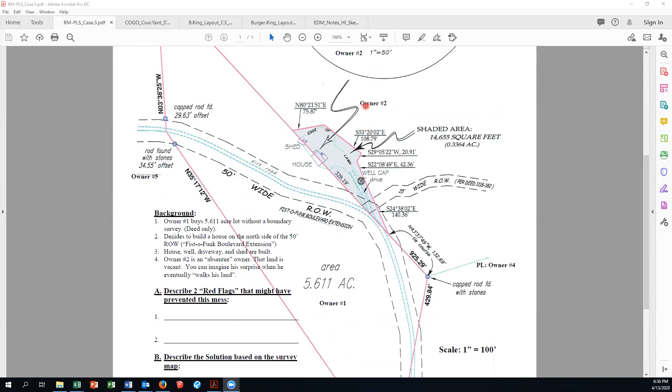So that was the first homework that was due. The second homework we'll talk a little bit about tonight, and we'll go back to it in a couple of weeks because we're not going to do any COGO tonight with new stuff. We're going to talk about doing a topographic survey and field notes for that.

But here's my calculations. If you went out to thousandths, I think it was 338.00. So the distance from WP1, which is the instrument setup point, it's N1E1. And then the first point that we wanted was WP3. Because it's a southerly dimension, this point is south, only about 10 feet of the north 0 line.

That would be a negative when you put it into the equations. So it's negative 9.61 minus the 63.73. So it's N2 minus N1 squared, and so on. So these are the answers. Most of them got them right.

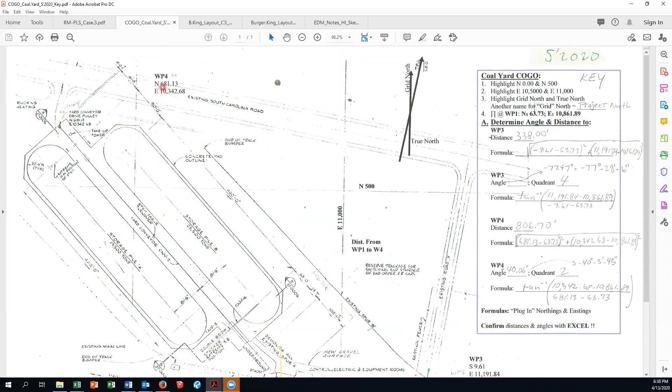And again, you're using these coordinate axes, which are running north-south and east-west. We're going to try to give you an exam in the next week or two. So with your calculations, or for the exam, go ahead and use the Excel. Learn how to use the Excel, and then also learn how to use your calculator. Okay, that's that. We'll come back to that at a later date.

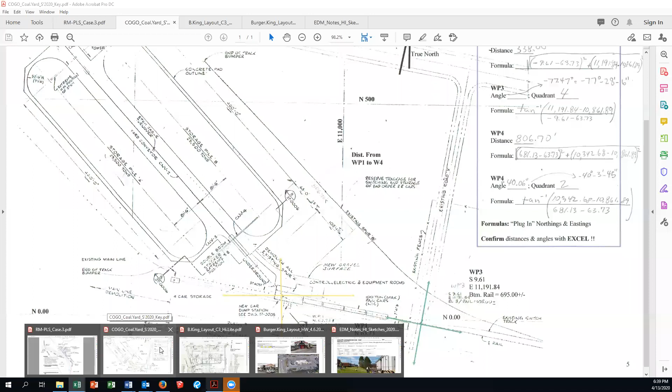Any questions on the COGO, coordinate geometry? Anybody? Bueller?

Okay, can you guys still hear me? Yep, yes we can. Okay. Burger King, not one of my favorites. Ooh, probably shouldn't have said that on a recording, but I like some of their food.

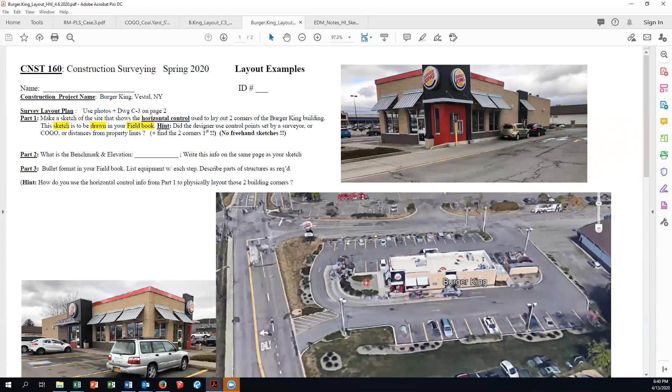Anyway, this one is a little bit trickier to do. Here's the aerial layout, the actual building itself. This is the drawing C3 that you were given. And the marked up C3 is right here. This one, not so good on the homework.

What you're looking for are tie-off points that go directly to a corner of the building. So the first thing you want to do is kind of zoom in on that corner.

You really don't see anything over to this corner or this corner, but you do see some arrows, not easy to find, on this corner and this corner. I kind of hatched it in blue - that's the actual Burger King itself.

If you follow this arrow, we'll pick this one in red and then this one in green. If you follow this arrow, you've got a dimension of 86.59 going back to what? What are they measuring to? Not a control point - they haven't given you any control points. So what are they measuring? The property line, okay?

Which eventually the property line is based on points that you can find in the field - 3 out of the 4. So you had to show me in your sketchbook, you had to show me the building, you had to show me this 86.59 up to this property line. I wanted to see that.

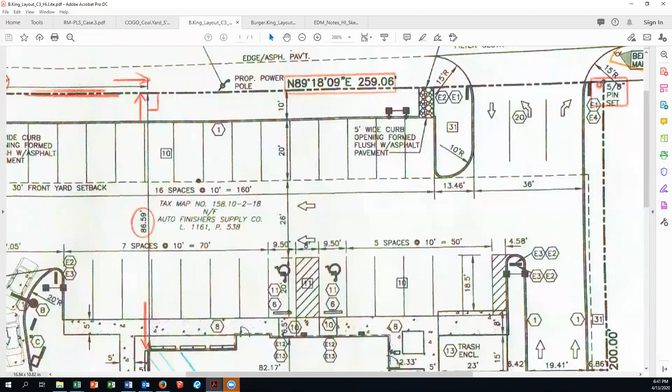This bearing and distance goes from this 5/8 inch pin that was set over to, whoops, nothing there - we'll talk about that in a minute. But you come up to this point, and then the distance I wanted to see was 103.87. Well, if that's 103.87 to there, you could have subtracted it from this distance, which gets you back to that pin that you actually can physically find in the field.

So that's about as much as I could find, these 2 points for horizontal control to lay this building out. Okay, any questions on that? We haven't talked about Part 3, which we will, because that'll be homework that's due - we'll discuss when that would work for you to be due.

Part 3, think about bullet format in your field book. List equipment with each step. So really all I'm going to be looking for is how do we locate these 2 points. Once we locate these 2 points, we can do offset points, and we can locate any one of these other points along the building, either using this civil drawing C3 or the structural drawings, which you do not have.

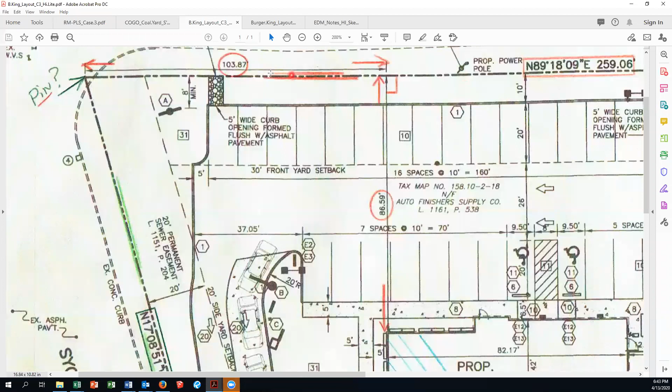Okay, this point over here has got another arrow - again, not easy to see - with a dimension 67.36 that goes from the building over to this property line. And this green line right here is the same as this, which shows they should have shown that as being 90 degrees. You'd have to assume that was 90 degrees to that property line here and then to this property line here.

So this is a 90 degree coming off of this property line. 67.36 gets you over to that corner. Where on that property line is this point? Well, it's not 44.20 - that goes back to the start of a curve for the entrance into the BK. It's actually the 69.9, which goes from this intersection at a right angle of that 67.36 foot dimension back to a capped pin found. So that's cap pin found.

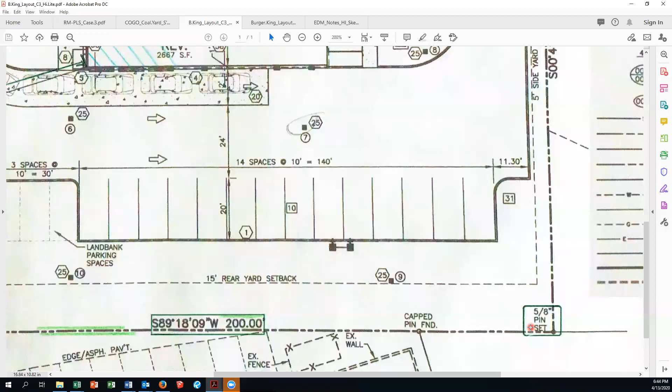Okay, you've got a bearing and distance here that you can use. You've got a bearing and distance here, which gets you over to a 5/8 inch pin set. So really, if you zoom out, of the 4 property corners you've got 3.

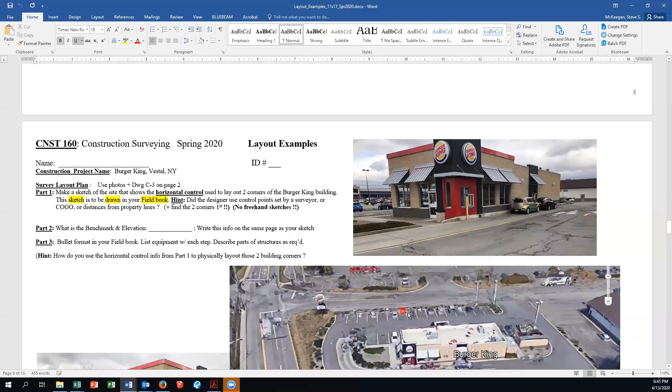Now, what office work - let me write myself some notes here. We're going to assume, you want to write this down somewhere, assume no obstructions. Because if you go back to the aerial, there might be a little obstruction right here, but there's really no obstructions, right? Now this is after the thing was built, so we're going to assume there were no obstructions. There might have been a couple of trees, okay?

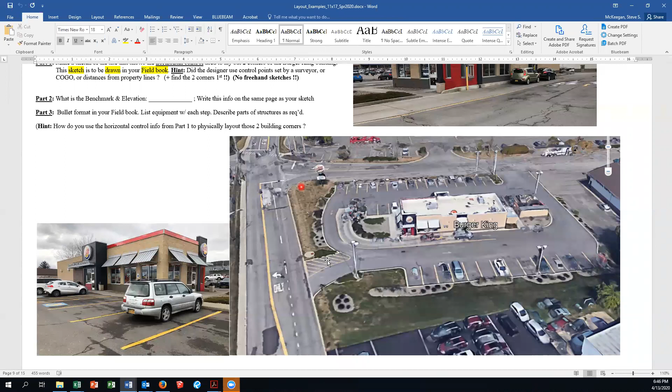So assuming no obstructions, what office work would you want to do before you go out to the site, walk the site, and then go back to the office? And using Civil 3D, what activities would you work on - what could you do in the office before you went back out to the site to lay out these 2 corners?

All you're given is this PDF. You're not given the CAD drawing. You're not given the original survey. But you have Civil 3D at your disposal. So what would you do?

Find your benchmark and set your pins. Now your benchmark has nothing to do with your pins - that was part of the assignment that was due last night. So the benchmark was there, and then there's its elevation. The benchmark has no coordinates, so there's really no tie-offs to that.

Hey, Mr. McKeegan, Bianca's in the waiting room. Who? Bianca. Oh, thank you. And also Mr. Hopkins. Great. Yeah, just chime right in if I don't pay attention to the waiting room.

Okay, so let's go back. What can you do in the office? You learned how to do this for Spec House 1. You were given the survey, not a CAD drawing, but the paper survey, the PDF if you will. What did we teach you to do with that survey?

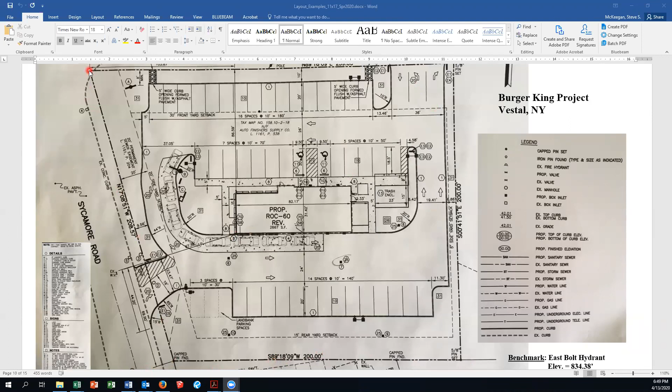And then from there, you draw this bearing and distance to this point. You now have this polygon, okay? And then from there, how do you locate this building corner? Now that you've located that property line using CAD, you now have these four corners.

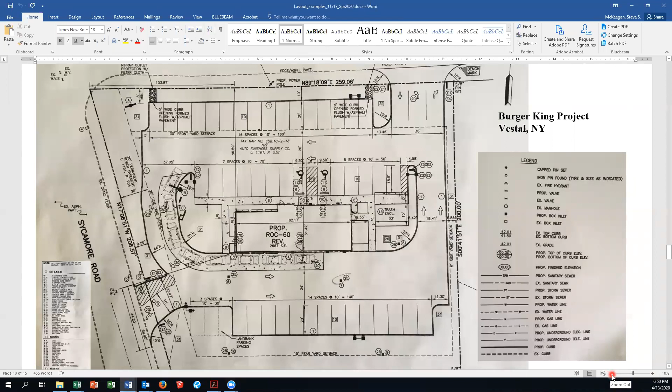Let me zoom out just a little bit. Right, you got these four property lines, all plotted. Now, how do you find this corner and this corner on CAD?

When in doubt, what? Offset. So if you offset this line 67.36 feet, it's going to be a line right there. And then you offset from here 69.9, that gives you that point. And then, 90 degrees will give you that point. So you now have that coordinate for that corner right there.

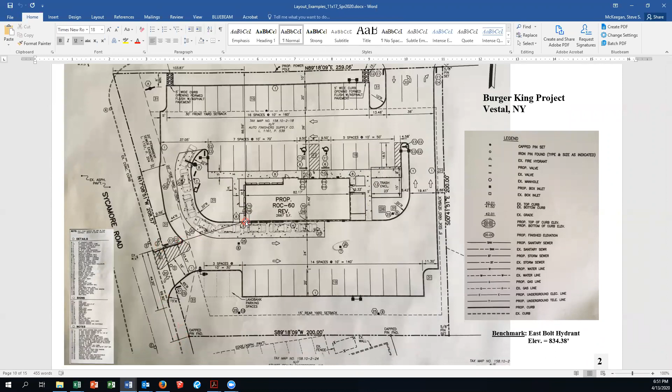How much do you offset this point? Or this line? I want these steps written in the homework. I want the homework for part 3 in bullet format.

How are you going to lay out this structure? I want you to describe exactly what we're talking about. You can actually, I'm not going to make you do it, but you can get on Civil 3D. That was part of the email that I sent you, that software is available through Horizon. So check that out. But you're going to take this line that you plotted in Civil 3D, and you're going to offset it

86.59 feet. Okay. You're then going to offset 103.87 from this point. That'll give you this point right here. Draw a perpendicular line from here to here. You now have the 2 points.

You actually now have their coordinates, the northing and easting for this, the northing and easting for this. I think next year, God willing, and the creek don't rise, we may just put this on Civil 3D while we're in the lab.

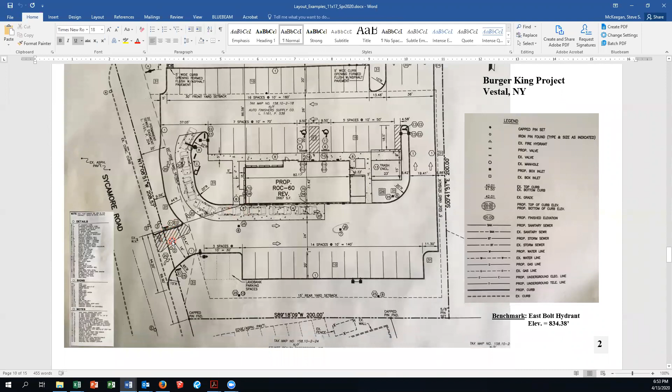So that's, and that was on the, oh, I thought it was. Oh, there it is. What the hell is this? Oh, this is just the, oh, there it is. Okay, sorry. So yeah, this is a right angle. It's got to be a right angle. There's no other way to do it.

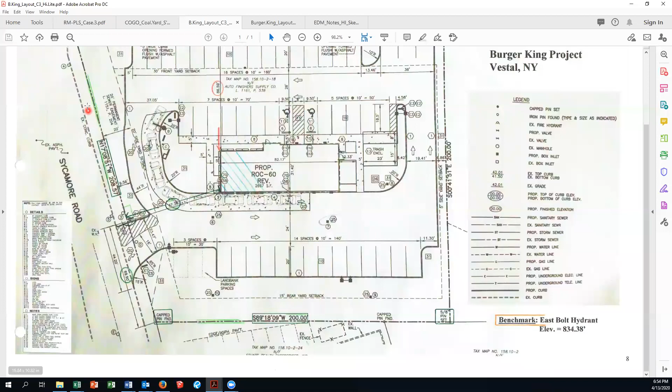After the 67.36, then it was 100 point what? 108, I think. See this 69.90 right here, yeah, is measured from an imaginary line between this capped pin found and this one, which you've located on CAD.

You could just offset this 5 feet and draw in this little line, which is 90 degrees to this. Then offset this one 69.9, and now you have the point right on this property line that's 69.9 feet away from here. Then you offset this entire property line 67.36, and it comes over to here. There's a big line right here. Then you just draw a point from here, 90 degrees to this line, and set a new point — that's your building corner.

That's your building. Mr. McKeegan, Damien's in the waiting room. Yep, I just let him in. I saw it too. Thank you.

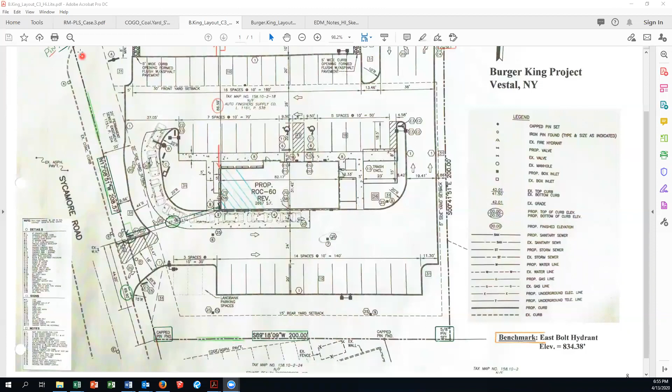Okay, so you're doing everything on CAD, but when you're on the computer, you got a big blank screen. Set this point at say north 2000, east 4000. That sets the point, and then you can just start to do all of these bearings and distances like you did — we didn't do it very often, that's why I'm not going to make it an assignment. But we could go into units, get surveyor's units, and plot each of these lines, bearings and distances, then you're just doing all these offsets to get to here. And you've established 2 points with their northing and easting.

So now you've got some CAD drawing, and you go out to the field, and let's say you have a laptop with this, with the Excel, okay?

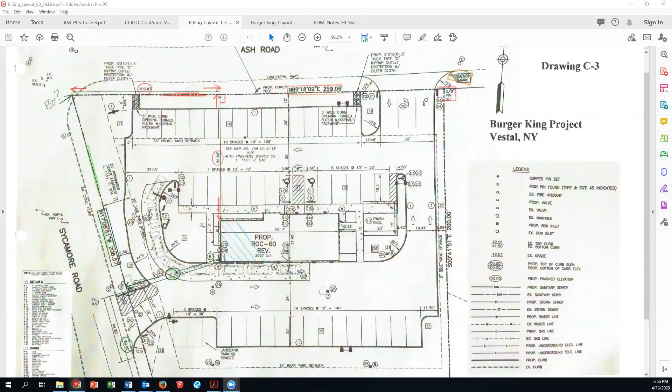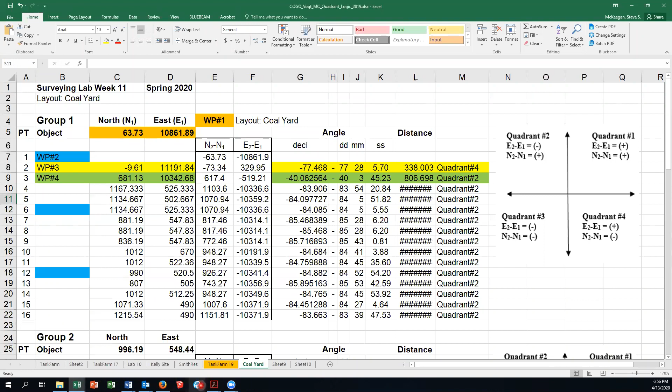But the thing is, where are you going to set up over? That's the million dollar question. What physical point are you going to set up over? On this one, Mr. Van Duzen and a friend of ours, Kevin Yurden, who's a surveyor, helped us with this idea. You can set up anywhere as long as you can see — you could set up right here, put your instrument right here, shoot a distance to here, shoot a distance to there. If you had your laptop, you could do a circle radius from this point, the same distance as it is to your EDM. You strike that arc. You do the same thing over here, strike that arc — that's the point you're set up over.

You now have the northing and easting, and from there you can do all the coordinate geometry. So see if you can figure out how you're going to set up the instrument using the CAD drawing and using coordinate geometry.

Because another method could be — and don't tell anybody you're going to do this, because you usually don't like to set up over property points — but you can make the argument that you want to set up over this point and backsight the other property pin. You now have 2 points in the field. You can calculate this angle, or go to your CAD drawing and find what that angle is. So you backsighted here, zeroed it, swung that angle, and now you have the line of sight up to here, don't you?

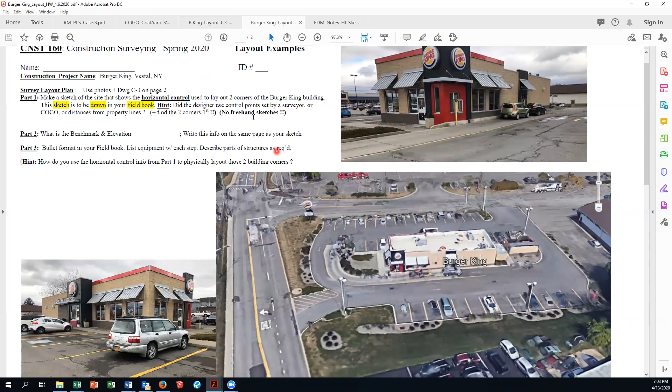Okay, really start thinking about what you're doing: setting up over a point, backsighting, zeroing, swinging an angle. So if you're going to swing an angle, say you set up here, backsight here and zero it, what is that angle? I want you to tell me what that is, you should be able to figure that out, based on bearings. Go back to chapter 14 and that'll help you a little bit. Based on bearings, okay? So that's that.

And if you get a good grasp of this, you guys should be looking for jobs in surveying, construction surveying, or just boundary surveying.

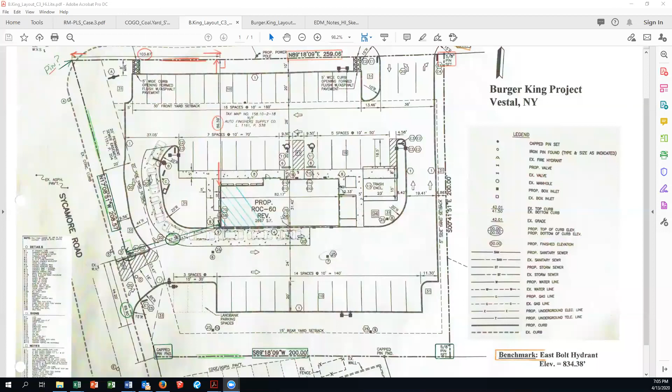Okay, we are now going to go to the handout that I gave you. I both emailed it to you and posted it to Vanco. And what this is, is the beginning of setting up a notebook to take topographic data, for a topographic survey.

And we're going to go over this very slowly. We're going to take two weeks to do this: tonight, the rest of tonight, and all of next week. And then we'll get back to coordinate geometry.

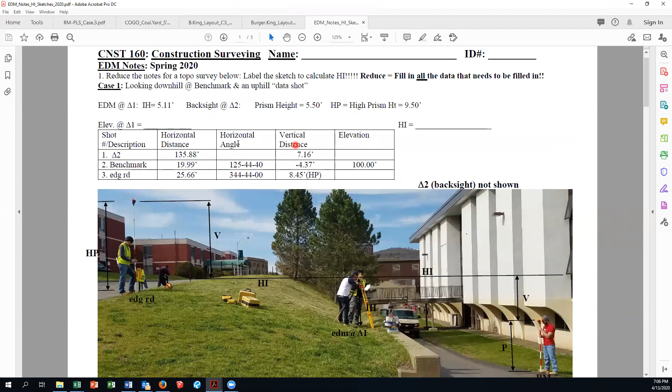So when you go out and do a topo survey, the total station right here is taking horizontal distances, horizontal angles, and vertical distances, okay? And this is, I think, the first thing that's going to be due. Well, here's the old total station. You have a handout of that which tells you each of those components, gives you each of those components.

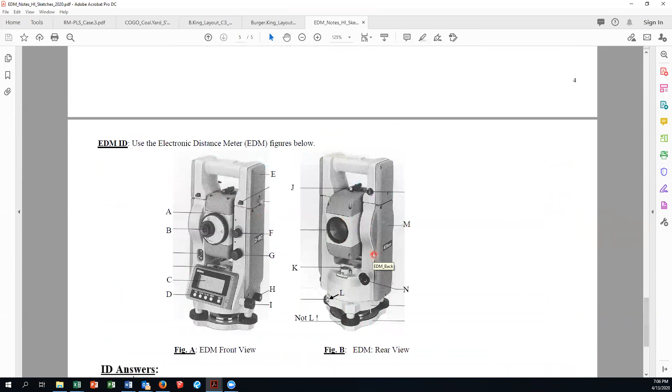And we want you to identify those components, and let's have that due, what do you figure...

Friday night? Saturday night? Either one, Saturday, it'll be Saturday. And that is the 18th, right? At 11:59 p.m. Easy 20 points.

Now, just this page is what's due Saturday, or the entire thing? Well, I'm going to put this all on Vanco, but there's going to be one other easy assignment between now and next Monday. So there's going to be a third assignment, which will probably be due Sunday night, but it's going to be very easy, okay.

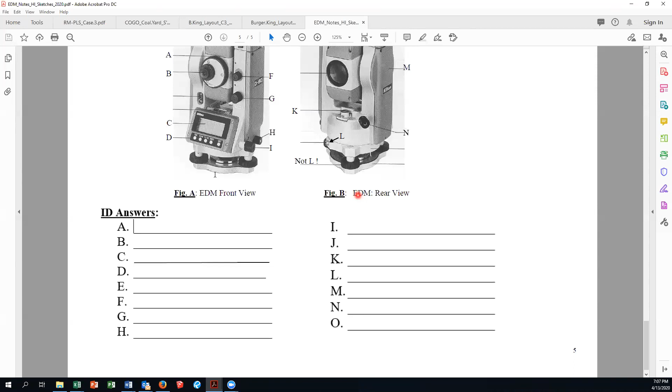So this is using the total station, and Mr. Martin and I might be going out and doing a little video, if they'll let us on campus, showing how to use this, okay? So...

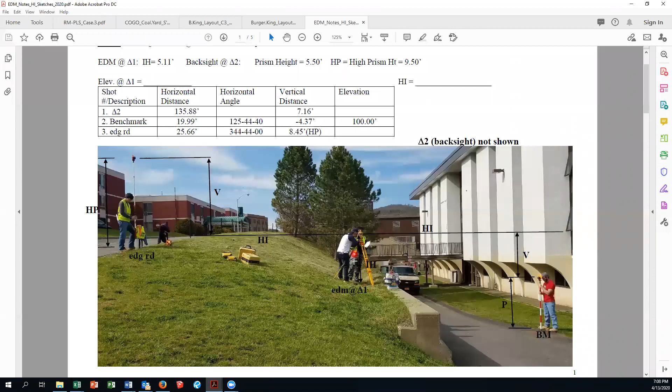This is how you're going to set up your notebook. It's going to look like this, but imagine—this is Murphy, right? Or O'Connor. Yeah, I don't know, that's Murphy. And this is, oh God, it's been so long, Russell Hall on campus, I forgot what it is. I probably forgot where Smith is. That's Russell Hall. And what we did is, it was just a great place to set up the total station to show taking a downhill shot to the prism and then taking an uphill shot to the prism.

Now, according to this data right here, my instrument is set up at Delta 1, and this delta means what? This triangle. What's that mean, what's another word for delta?

Like change or difference? Change. Nope, it's a control point. Okay, I've got to give you guys a test. I've got to figure out how to do that. I'll get with Mr. Van Duzen, just on the basics.

So delta 1 is the same as saying CP1, control point 1. Let's say I'm doing a topo survey of the area between Murphy and Russell, and I set up a control point right here. I'm going to backsight delta 2, which is the same as saying backsighting CP2.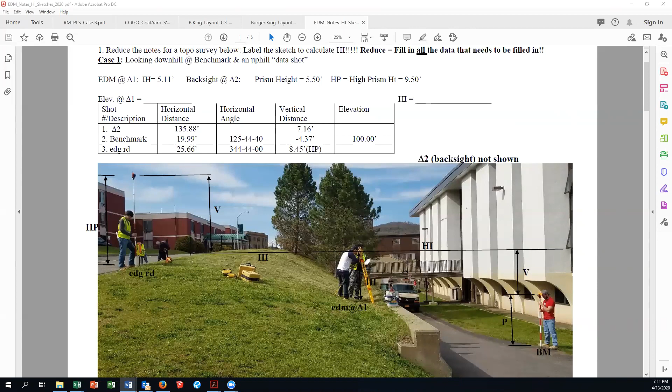We got Max Mick, and they didn't write their whole name, so I don't know. Is McNally already here? Well, you think we trust admitting this guy? Yeah, sure, easy for you to say. Anybody know McNally's cell phone? No. Okay, this guy is an anarchist, we'll boot him the hell back out, okay? Hey, Mr. McNally, is that you? That's not good, tenants are not paying rent. How much worse can things get? Oh, we're gonna put in a waiting room.

Okay, now let's go back to here. So on here, again, make some notes for yourself. Delta means what? Control point. So if I'm backsiting

delta 2, and delta 2 is not shown, maybe it's up in here somewhere. Hell, maybe it's up on the corner. I put one of the students up on the corner of the roof at Russell. Okay, that's my control point.

I'm kidding. What should the horizontal angle be from delta 1 to delta 2? What do you mean, the exact number, or just positive and negative? What do you think I mean there, folks? I'm setting up at delta 1, my backsite is delta 2. What's my horizontal angle? Zero.

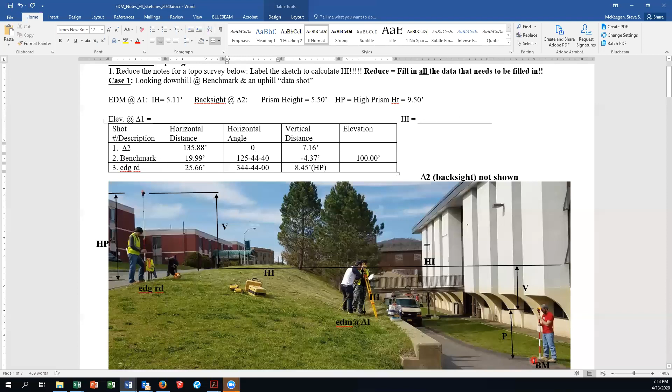Okay, so I'm backsiting delta 2, and I want to locate the benchmark. What do you think the benchmark is right here? It's hard to see. Is it a manhole cover? Yep, but I'm not going to shoot the cover because the cover can come off. You shoot the rim—I'm going to shoot the rim.

I take a little cold chisel, which is not a wood chisel but a metal chisel—what we call a cold chisel—and I'll make an X, or put a dimple in the rim, so that the point on the prism pole sits right on there.

And this person right here is holding that plumb, because there's a little fisheye bubble level on the prism pole. And then this person is lining up the crosshairs of the total station to hit right dead in the middle of that prism.

Remember that prism had a focal point in the mirror, okay? And what it does is it sends out a little photon torpedo from Star Trek—actually it's a light wave, infrared wave, I can't remember, it doesn't matter. It sends a photon torpedo and it reflects off this prism, burps back to the total station,

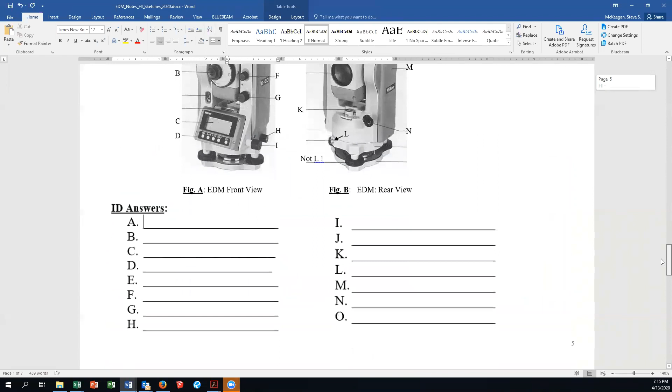No, right here, this is M. That is the pivot point of the telescope. It also is the HI line. Ooh, I just gave you an answer.

We're in America, you can do shit like that, okay? Oh, shouldn't have said that. Now, does that make sense? So that dot right there—there's actually two dots on this total station, and it literally is the center axis of the telescope. The telescope can rotate up and down.

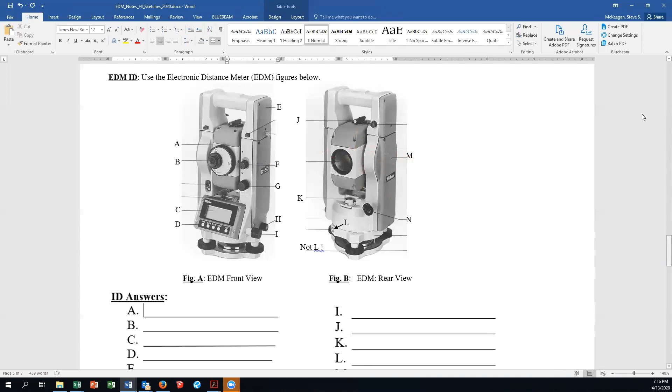So here, again, that's the HI. We'll talk about that in a minute. Are you with me so far? Stop me at any point that you're confused.

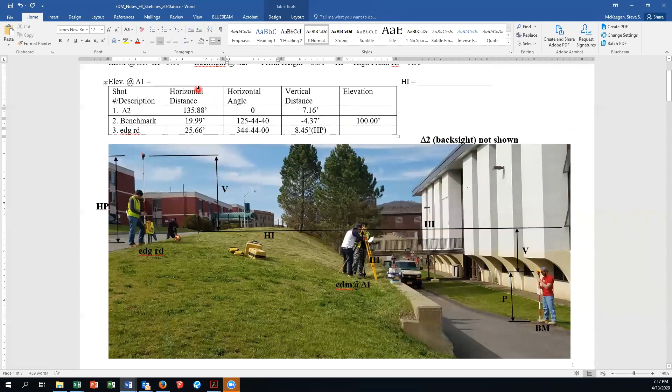Didn't we fire up the total station in one of the lectures? Yeah, and we took some data for you. So the data here, the total station is at control point 1, backsighting control point 2. That's my zero angle. I shoot the benchmark, the horizontal distance to the benchmark from the control point, horizontally, is 19.99 feet.

Vertical down, the V is negative 4.37. Where'd I get the elevation of 100? That's just you deciding that's what the elevation was going to be. I assumed it, right? That's not 100 feet above sea level. Now, I could have gotten an exact one based on a USGS hub, but we're just calling it elevation 100. Okay?

Now, I also wanted to take a shot on the edge of the road. I'm going to take some shots to define it. I'm going to shoot the corner of Murphy. I'm going to shoot this walkway. I'm going to shoot this retaining wall. Will I shoot that truck? You could, but I don't want to - it's moving. That was a joke.

Okay, I can shoot the corner of Russell, this other annex, the other wing of Russell, the center line of the road, a couple of shots along the ground, these pine trees right here. So I only took 3 points that I'm shooting right now. And you're going to do this - you're going to take a topo of the area between the wall complex, right next to Smith, the maintenance building, and the soccer field, because we want to put a sidewalk along the back. All you college kids just walk in the center line of the road - I did it one day too, and boy, they come peeling around there.

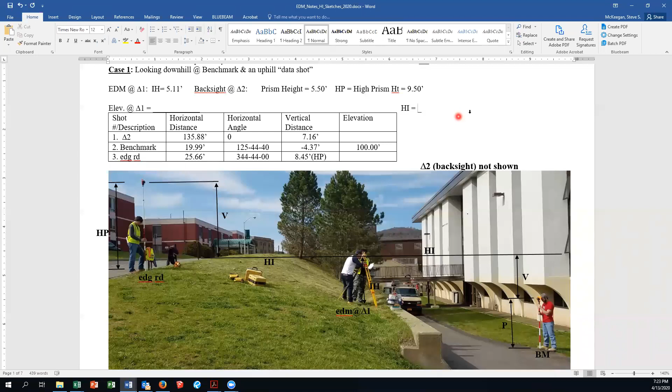So if you haven't made a copy of this, no biggie, write this down. The HI is equal to 100 plus you turn that vertical distance from the benchmark into positive, add that to it, and then add in the IH. And there's your HI.

No? You're close, you started very well because you started at the benchmark. But what data gets me from here up to this imaginary horizontal line? You're right about using V. It's the prism height plus V. Right, oh my bad, well that's okay, you were starting out plus.

Somebody want to shut that dog up, please?

Plus V. But V is negative, because in my data book it's negative because I was shooting downhill, but it's the absolute value of V. So what I'm going to do is I'm going to put these two little lines, and that's the absolute value of V. Does that make sense? It makes sense when you look at the picture.

So it's benchmark plus P plus V. So that equals 100 plus, what was P? 5.5, 5.50 feet. And what's the absolute value of V? 4.37 feet.

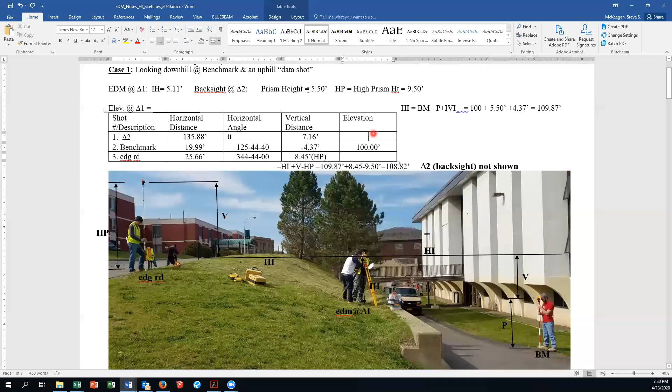So see if you can figure out that elevation. See if you can figure that out.

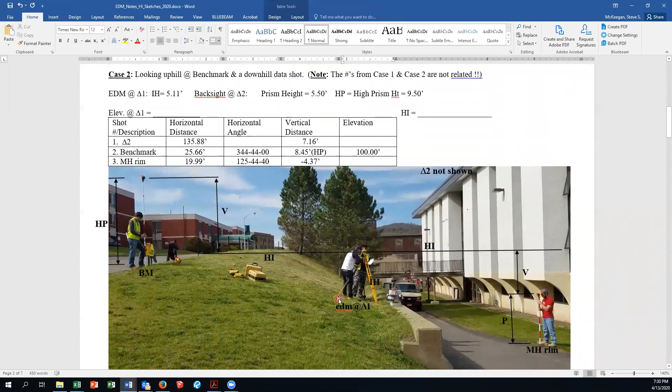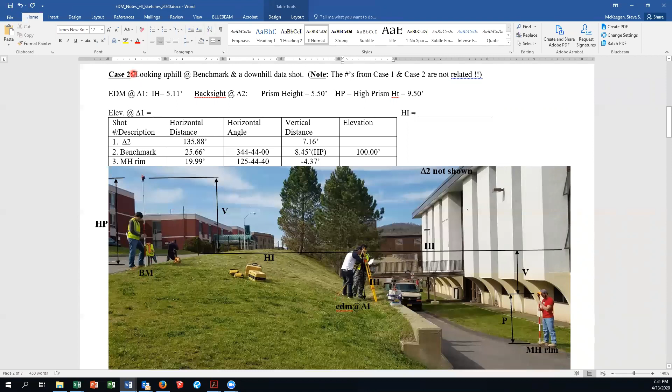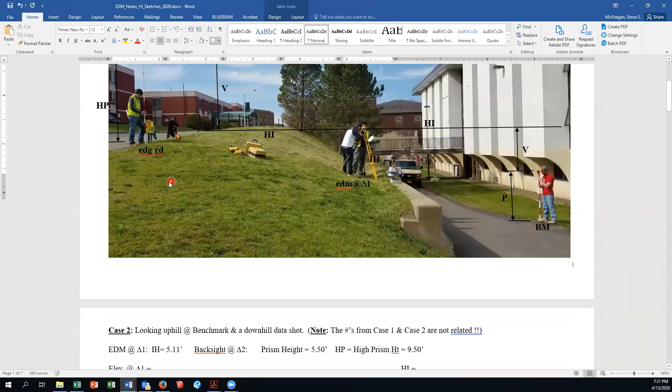So let's go to another situation. Now all of a sudden, I'm picking the benchmark, and the benchmark is an uphill shot. Okay? And there's two cases. You're either looking downhill at the benchmark, or you're looking uphill at the benchmark. It's one of the two, right? The benchmark is never going to be at the same imaginary horizontal plane. So do you understand what we're doing now?

No longer is this the benchmark. Just to show, if you have an uphill benchmark, let's say I had a hammer drill, and I drilled a hole into that granite curb, and I put a PK nail there for a benchmark. Or I put a PK nail, say, in the asphalt pavement.

What's the horizontal angle here for Δ2? 0. 0.

So if you go back to the data, go back to the data.

How do I mute that thing? My pacemaker's going off, so just a minute here. Ooh, looks like Steve McKeegan is trying to get into the lecture. That's interesting.

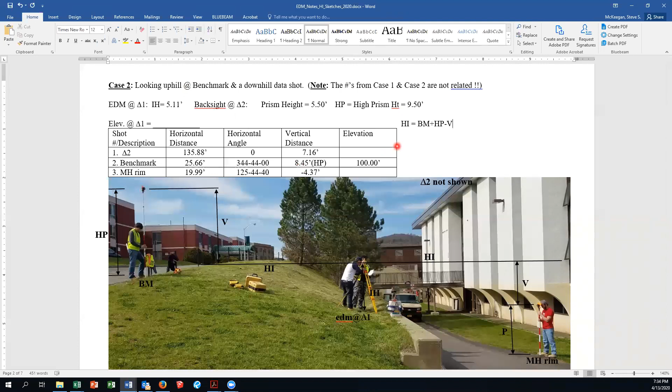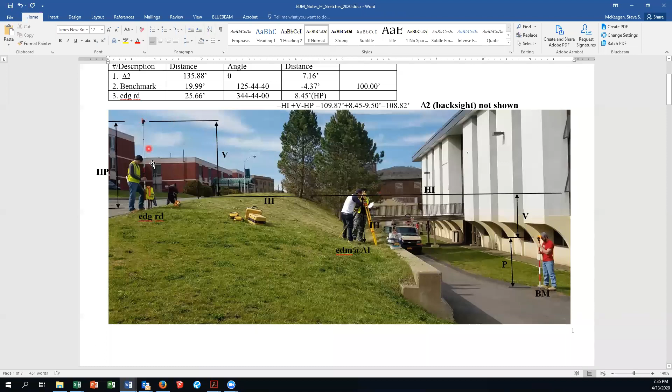But when you have an uphill benchmark, you're actually going to subtract V, even though it's positive. Whereas before, remember, if this were the benchmark and I wanted this elevation, I've already got the benchmark over here, I went positive V minus the prism. So when you're establishing the HI, you're either looking uphill or downhill. So this is equals.

The benchmark is 100. You're going to add the high prism of 9.50 feet, and you're going to subtract 8.45 feet, and that's going to give you a new HI. So it's 109.5 minus 8.45 equals 101.05 feet. It's just vertical, dealing with the prism height and the vertical distance, just to calculate these elevations.

So now I know the HI. Now how can I figure out the manhole rim? So that's going to be HI minus V minus P. It's going to be HI minus V, which is minus 4.37, minus the prism height, is going to give you the manhole rim elevation, because that's no longer my benchmark.

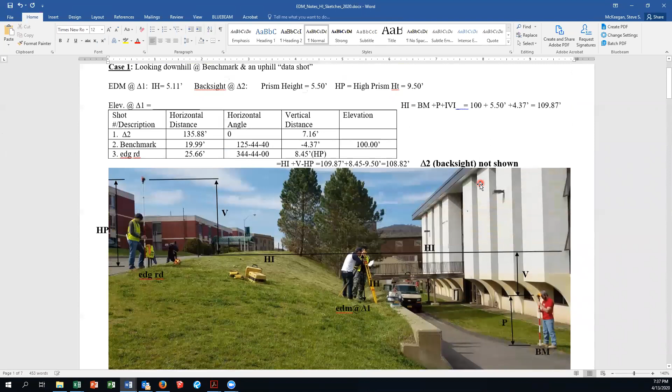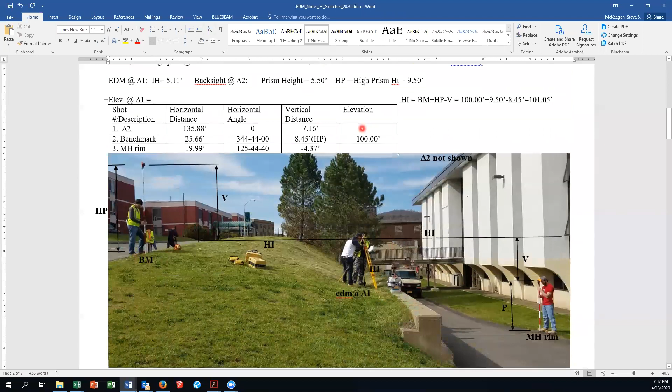Same thing with this one, so you got case 1 and you got case 2. See if you can figure out how we got these elevation values. Study that over the week.

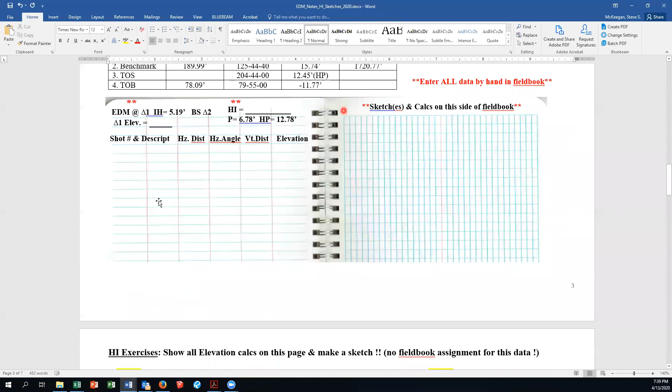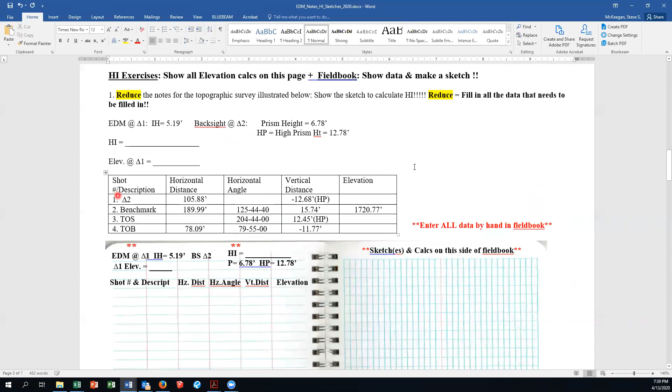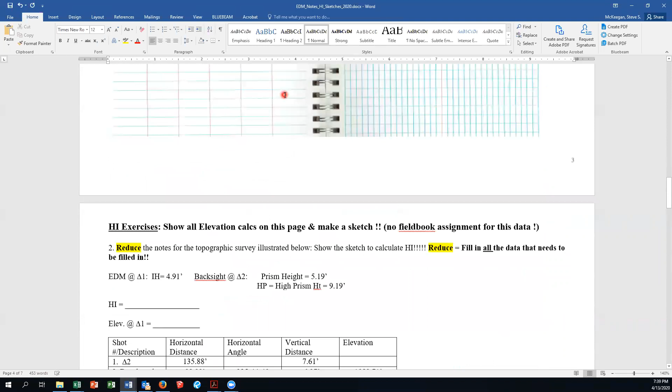So what we're going to do here is, in your field book, this is going to be due. I want you to enter all the data for this one in your field book. Only for this data, these are HI exercises. Both of these will be due after we talk a week from tonight. So they're not, the math is not due, but you've got to enter all this data into the field book just like you see here. So all of this data is entered in the field book right here.

I'm going to show you how to make a sketch, and this sketch is basically sketching this. I'll show you in a minute. So the shot number and description, like shot 1, delta 2, shot 2, benchmark, shot 3, TOS means toe of slope, and shot 4 is TOB, which is top of bank. These are just made up numbers, okay?

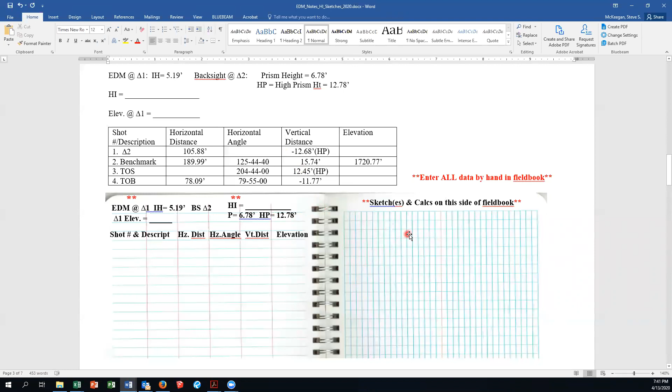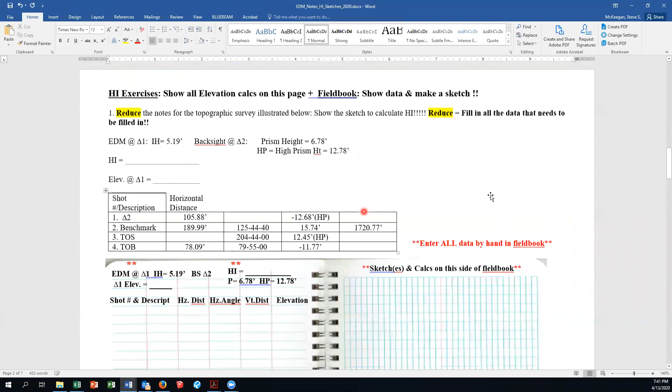It's just data entry, no calcs, plus a sketch. I used to do the sketch in class before I generated this handout. Let's see if I can pull this off here—it's going to look like this, and it's going to be rough.

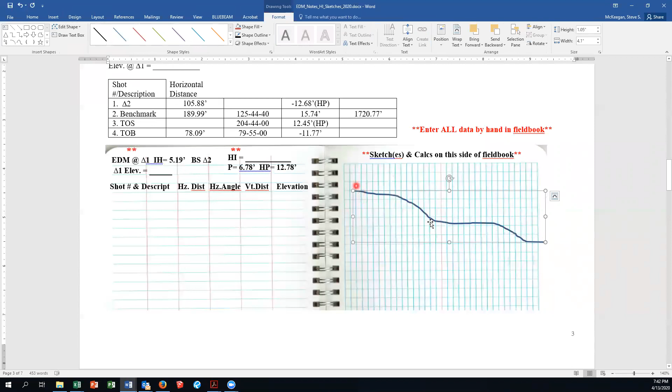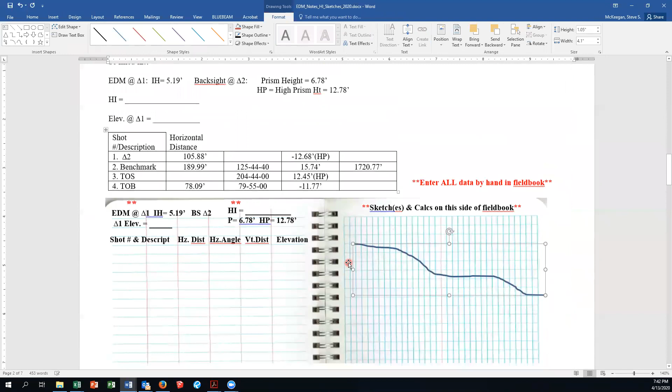Okay, so that's kind of the lay of the land, like what you saw up here, right? Now in this sketch, based on what you saw, where would the total station be? Right about here. So your sketch is going to look like this.

A lot neater, no freehand. So there's your total station—and actually, here's your prism, and here's your other prism. I always make these sketches when I have to do this as a test. So that's one prism, that's the other prism.

And then the HI, right there—you're going to label that HI. You're going to label this prism, label this P for prism. And then the vertical—there's your vertical distance. Now you may want to get another straight line.

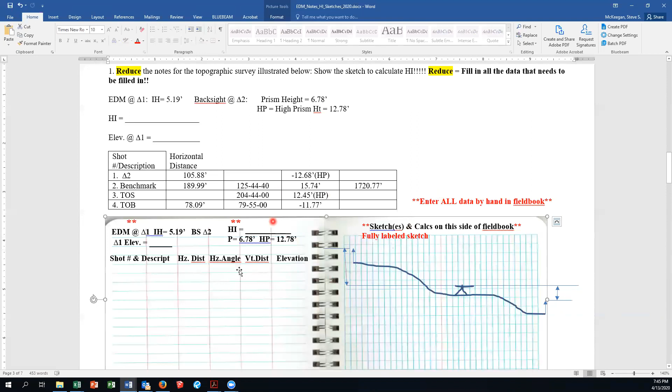So the sketch, and eventually your calcs are going to go here, but you don't have to do the calcs—just enter all the data by hand. I want a fully labeled sketch. That's what's due. Try to figure out the numbers if you can do the math, do it off to the side before you enter it in the field book so you don't have to erase. We'll give you some hints on this next week, but try to understand all of the work here.

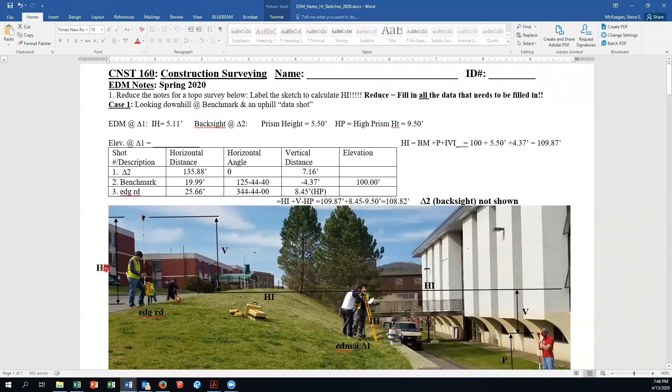All you're doing for the elevation is either moving uphill or downhill. The V is data generated by the total station. How do we get P? We actually take a tape and physically measure it from the bottom of the pole to the center of the mirror.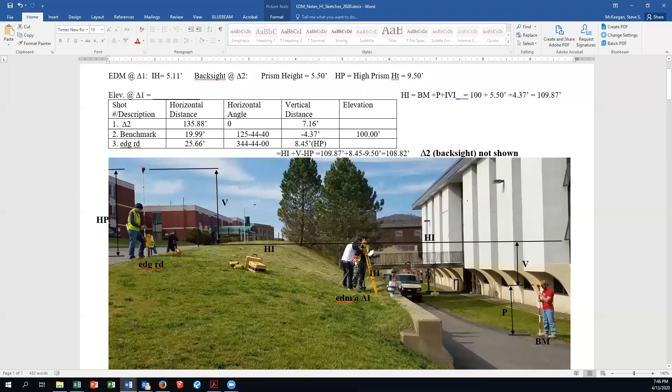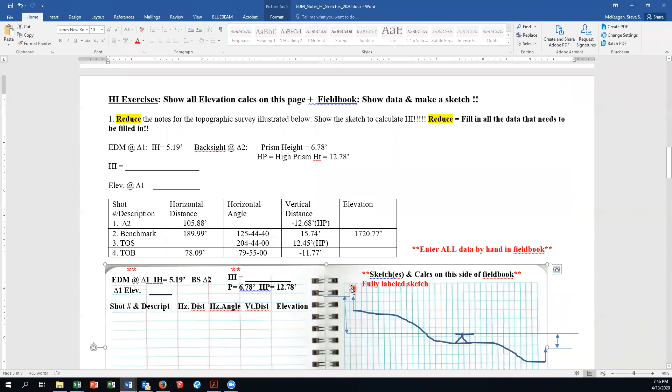Probably do two weeks—well, wouldn't be two weeks, but we'll go through what's due next week. Let's review, I'll put this on Vanco, all of these dates. One date is for the Burger King assignment—we agreed on Thursday at 11:59 p.m., the 16th. Everything's going to be in your field book.

You're going to talk about the office work that has to be done using Civil 3D. You don't have to do it—just basically say that you're plotting the boundaries, which are bearings and distances. So Burger King, Thursday, 11:59 p.m.

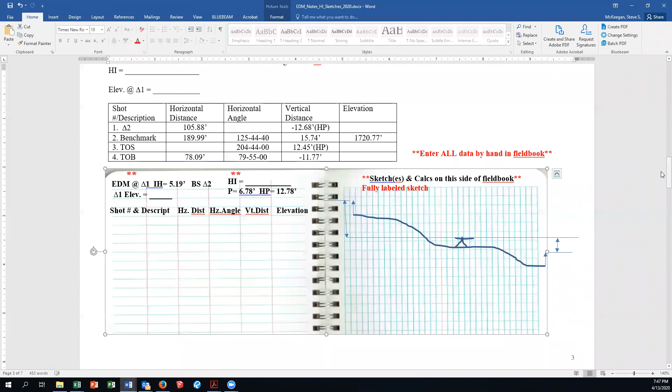Saturday—what was Saturday? Oh, Saturday the 18th, and that was this filled out. I just want to see the assignment that's due. Some of you are giving me too much, you're making work for me. Just fill these in, you've got the handout to help you with that. That's due Saturday—throwing a lot of easy points at you.

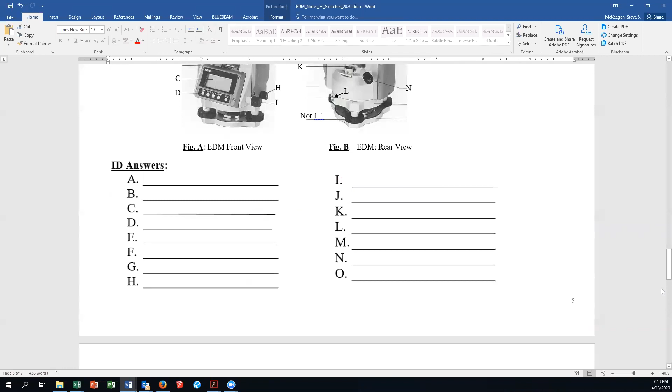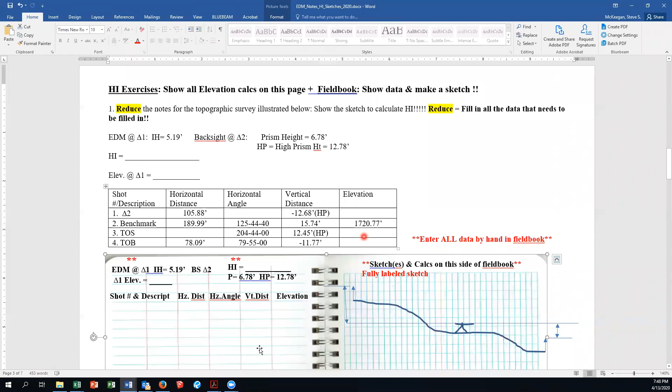And then Sunday, you're going to show me pictures of your field book, fully labeled sketch, and all of this data written in here. You do not have to calculate the elevations, but try to understand as much as you can with these first two examples that we went over.

Everybody okay on that? Yeah. And I'll post that to Vanco. So now what I'm going to do is—oh shoot.

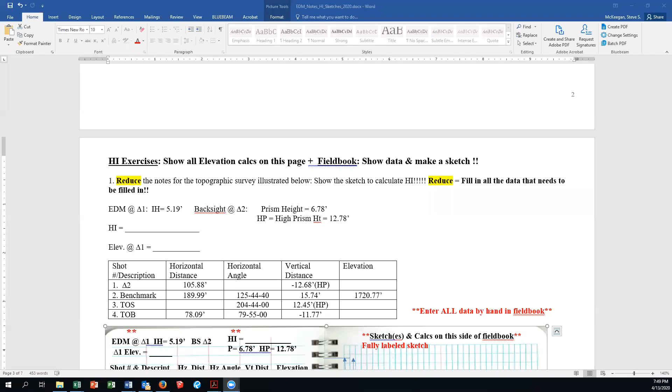Are you guys still seeing my screen? What are you seeing, still the Word doc? No. Or you... okay, damn it. There we go, now you're back to the Word doc? Yeah.

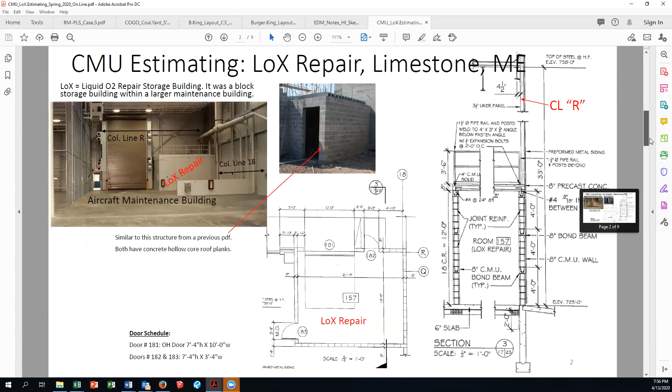Okay, now we're talking about heavy civil. The liquid oxygen building estimating is now due Tuesday night at 11:59 p.m. I don't think anyone from heavy civil who doesn't have surveying has shown up; there's a couple and they're not showing up. So again, with the openings, we had a 10-foot wide door, this was actually 3'4", even though it says 3, I changed that, and 3'4". They're all the same height, 7'4" high. So it's as if we're just butting them side to side, giving us a 16-foot, 8-inch wide door, as if they were just one door instead of 3. Then you just treat that as an opening.

I thought Jared Smith was already with us. Aren't you already with us, Mr. Smith? Well, let's try. Mr. Smith, is that you? You got to give it a second to connect to audio. Mr. Smith, you there? God damn it. Ooh, watch my language. Well, okay, I gotta get rid of this phone.

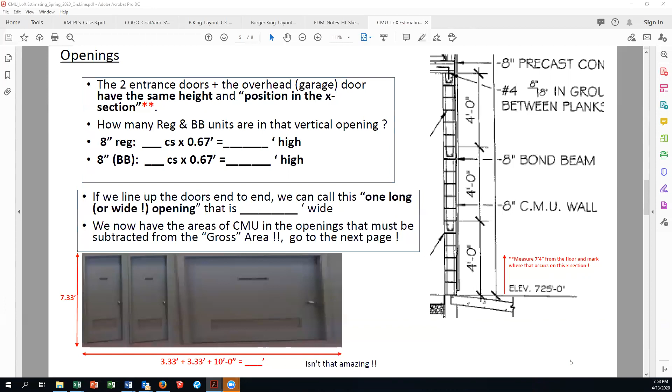Okay, sorry about that. So we got doors end to end, and we're walking through the number of bond beams in that opening. At 7'4", this is 4 foot to here, 4 foot to here, which is 8 feet, come back 8 inches high. So from 7'4" all the way down to here, there's only one bond beam in that opening. This bond beam acts as the header, or the lintel, for the doors.

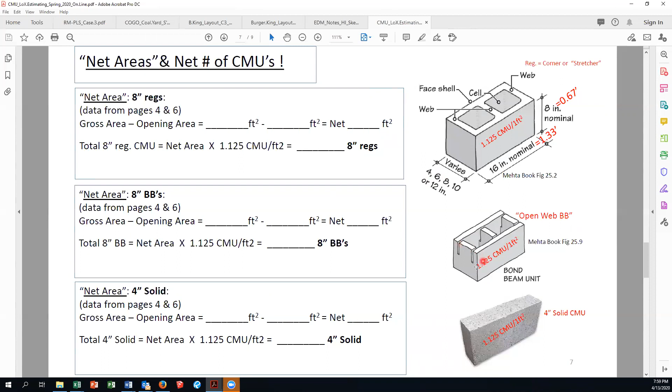I think Thursday will be the last day we talk about masonry, and then we'll move on to soils. In the next day or two I'll shoot you some photographs along with some details from the Catskill Hall dormitory and the fitness center addition, both using concrete block and brick. I may give you some identifications and we'll go over those handouts on Thursday - it'll be easy homework. Then I'll give you a masonry test; I need to decide when, and I'll get help from a colleague writing it to make it a fair test. That'll be test number 2, and test number 3 will be soils.

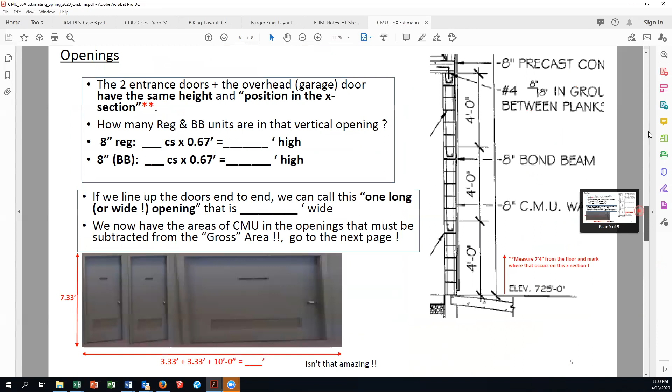Okay, so do you have any questions on any of this estimating? No questions? Wait, so just to be clear, it's due tomorrow at midnight now?

Yep, 11:59, because I'll tell you a quick story - let me stop, we'll put this on the recording. We went to Washington D.C. one year, and I had the bus coming in at midnight Thursday night, but they thought that meant midnight Friday. Luckily the week before I called to confirm when we were going to have the bus, and if I hadn't called, it never would have shown up, and we'd have had 44 kids with no transportation to Washington.

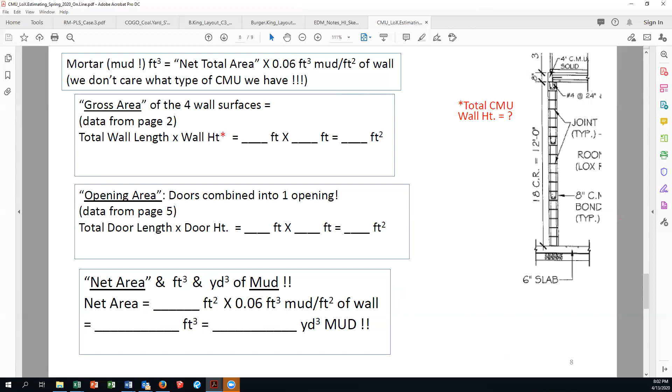Hey, I got a question, Mr. McKeegan. I looked again under Con 150 for the spec assignment - I know I submitted it and also emailed it to you, but it's still saying I had nothing for submission, not the most recent assignment but the one previous to it. I don't know what's going on with that. I've submitted it 3 times, I believe. Well, send it to me - I'm going to stop recording.